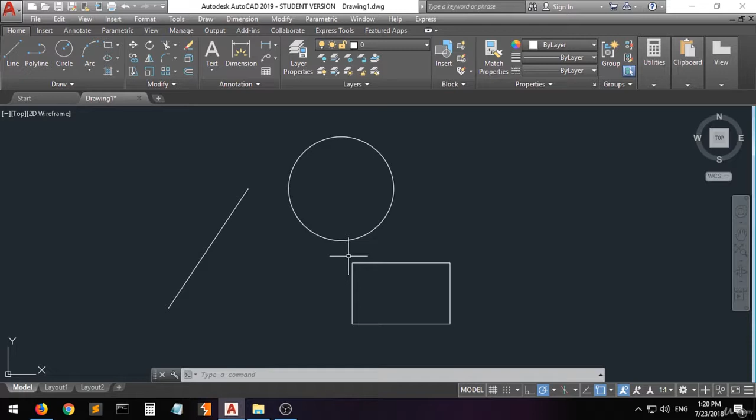You can use the mouse wheel for zooming in and zooming out. When you scroll up with the mouse wheel, you are zooming in. When you scroll down with the mouse wheel, you are zooming out. And this is very helpful.

Now, going back to setting up AutoCAD. First of all, you have to go to this button down here, which is called the workspace switching. We're going to choose the drafting and annotation. If you are creating 3D models, you're going to choose 3D basics or modeling. But since we're creating just 2D shapes, we're going to choose the drafting and annotation.

Now the workspace is set up, but we have to set up the dimensions and units as well. You have to type anywhere. Just type units. Press enter on the keyboard.

I'm sorry, I guess I typed it wrong. Units.

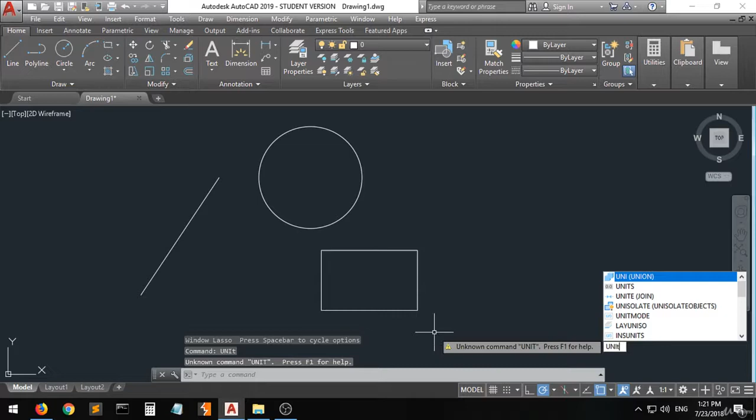Enter. Okay, you can see that a window has appeared, and the title of this window is called Drawing Units. You can see that the length type is in decimal, and the angle type is also in decimal degrees. I've seen some people using the architectural and engineering options, but I always recommend the decimal option. The precision is four digits.

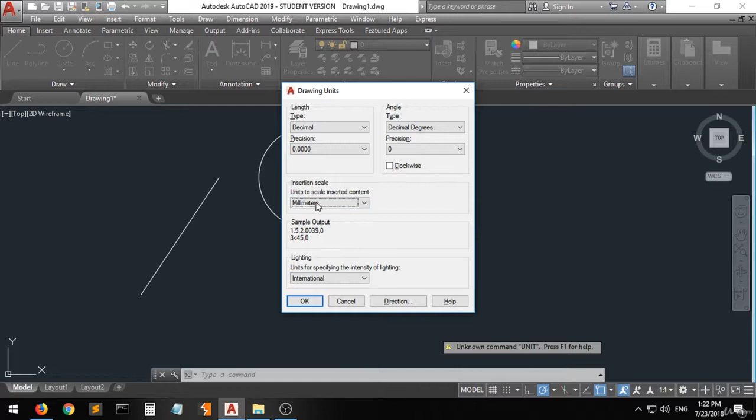Moving down to the units, as you can see here, I choose millimeters. Some people choose inches, feet, or miles. Some people choose centimeters or meters as well, but I always choose millimeters. You can choose the appropriate unit for your drawing. Click OK, and now the workspace and the dimensions are set up for drafting.

Now we have some other options. I always recommend activating them when you are drafting or doing 2D drafting. You can go to something called the Object Snap. When you click on the right arrow, you can see some options from this list.

But what do we mean by endpoint, midpoint, center, geometric center? Let's start with the endpoint. For example, let's assume that you want to create a line starting from the endpoint of this thing.

If this command is not activated, you can see that it is very hard to exactly select the endpoint of this line. Let's try. For example, I did this, and the line has been created. But when you zoom in on this angle here, you can see that I did not choose exactly the endpoint.

How can we solve this problem? We can solve this problem by activating the object snap and clicking on the endpoint option. Now, if you want to create a line from exactly the endpoint, let me show you.

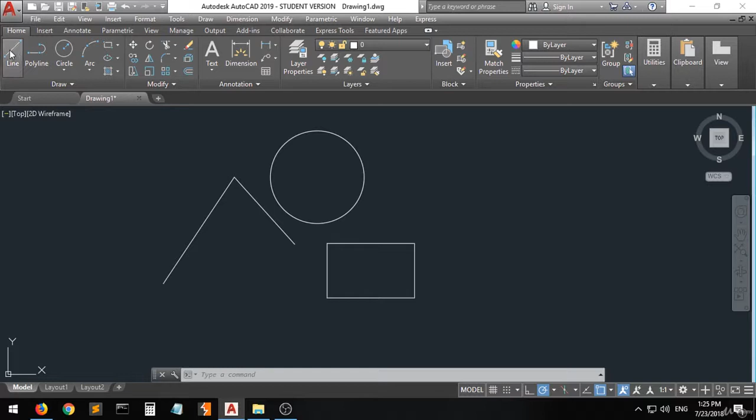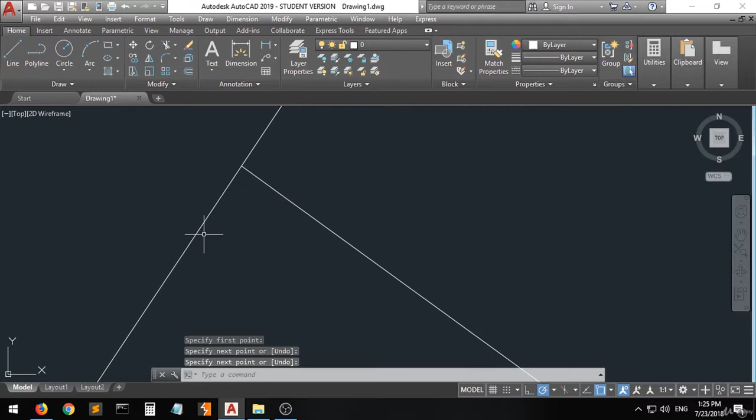This is very helpful. Now let's go to the other option, this arrow, the midpoint. If you want to create a line starting from the midpoint, you can see a green triangle highlighted from the midpoint. When you click on it, or anywhere near this point, but the triangle has to be highlighted, click here. You can see that it has been created from the midpoint.

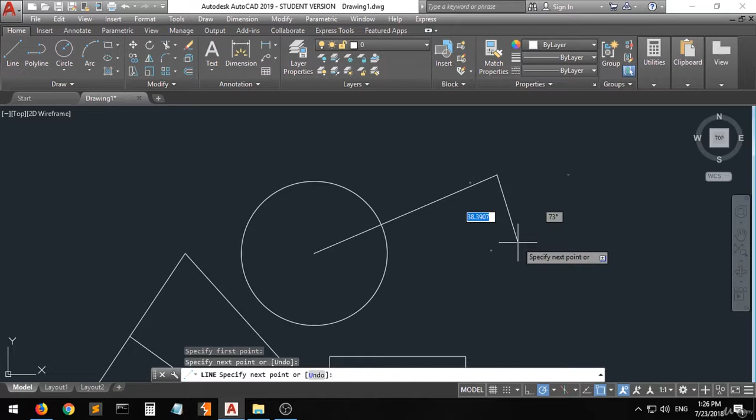Okay, some other options. We have the center. If you want to create, for example, a circle, or draw any line starting from the center of this circle, like this, you can see that the center has been highlighted with a green circle. Click on it, draw a line, very easy. And if you want to draw a circle from the exact point, you can also choose it.

Very helpful. Some other options: the geometric center. By this one, I mean the center of any shape besides the circle. So if you want to create a line from this center, very easy. Draw a circle, also very easy.

Now, let's see some other options.

We have the node, we have the quadrant. Activate the quadrant, see what this means. If you want to draw a line from the quadrants of the circle, you can choose this option. The line again, you can see from this quadrant, from this, all 4 quadrants of the circle, you can choose this feature.

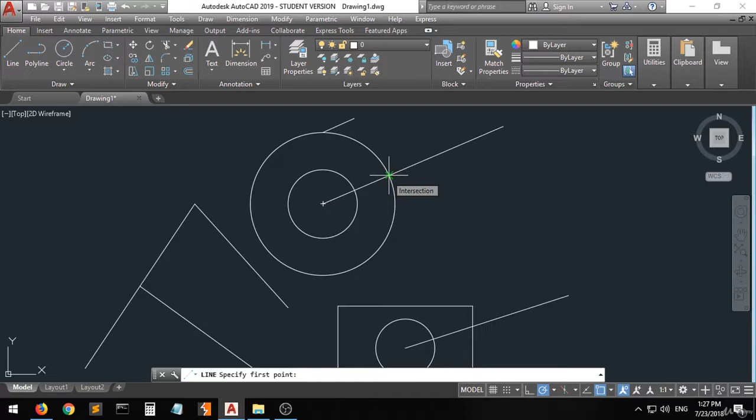Now we have some other options also: the intersection. By intersection, we mean the intersection of these points, or the intersection of a circle with a line. Now the intersection has appeared for you. Click on it. Very easy.

Some other options, let's see: extension. If you want to draw a line that extends at the same angle as any line, you can choose this command, for example, like this. Now, as you can see, there's a green line highlighted alongside the original line. Can you see this line? That means you are creating this line at the same angle as the original line. See? This is the new one and this is the original one. But they all look the same, at the same angle.

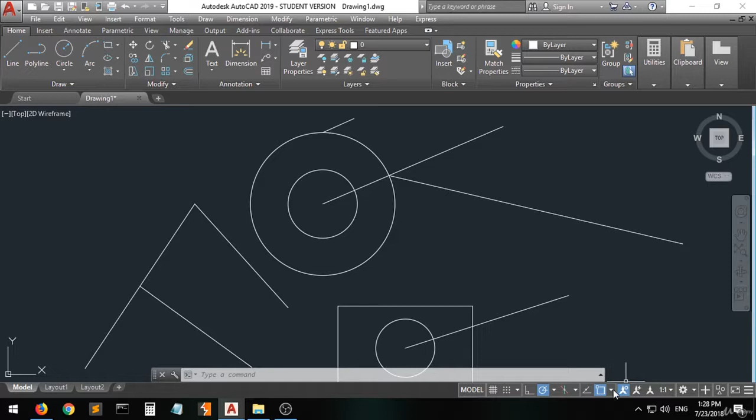We have some other options as well: intersection, perpendicular, tangent, nearest. There are a lot of options, but I always recommend you only activate 4 to 5 options, because it's going to be very confusing when a lot of circles, triangles, and intersections appear on the drawing, with some boxes, some circles, X's here and there.

It's going to be very confusing. So I always recommend only activating the endpoint, midpoint, center, remove this, and this. We have about 5 things checked: check, check, check, check, and check. I only recommend you check these options from this list. These options, as I told you, are very helpful, and they're going to be very useful when you create drawings and want to work very fast as well.